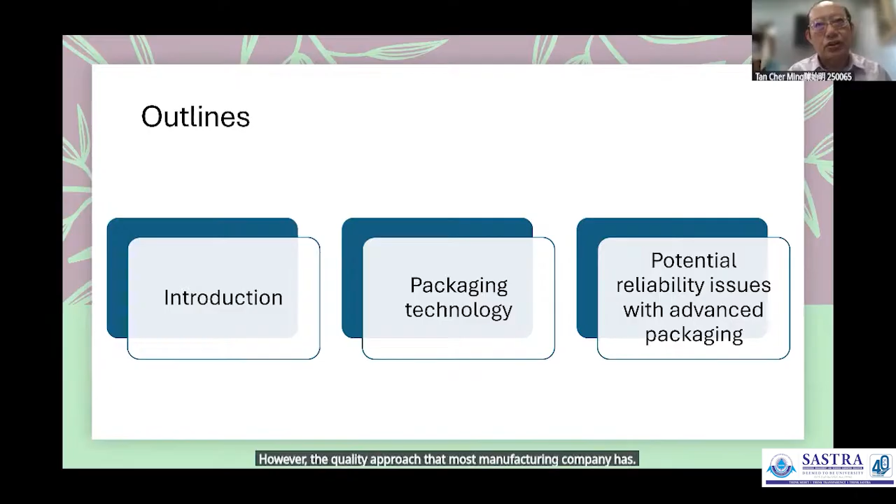However, the quality approach that most manufacturing companies have can only ensure that the functionality is there at the time when they ship to the customer. The methodology to ensure that the product can continue to operate at the customer site for the rest of the years, up to 10 or even 20 years, that is the regime of reliability. So quality and reliability are really different.

So today, what I want to look at is the potential reliability issues with this advanced packaging.

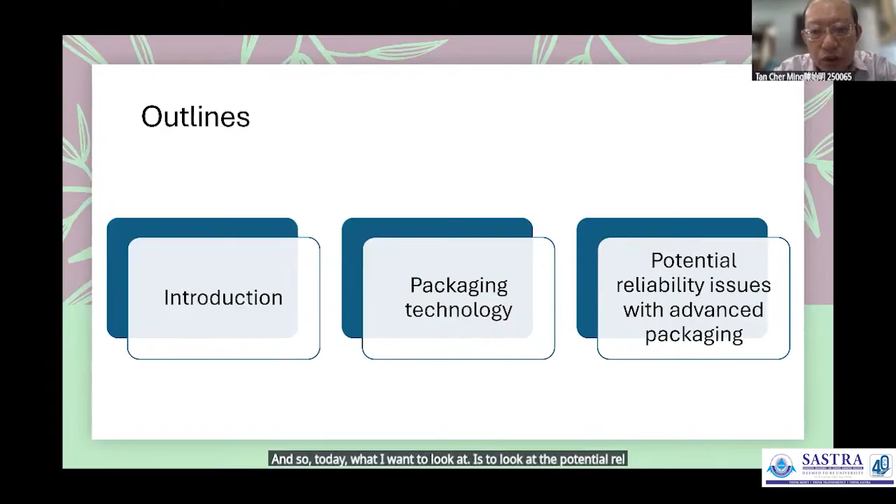As I mentioned, and as the previous speaker has spoken, integrated circuit packaging is a crucial final stage of semiconductor device manufacturing, because the chip itself is fragile. The silicon die is very thin, very small, very fragile.

Whereas the packaging is really to provide a protective case, so that this silicon wafer, although it can perform very high functionality, needs to be protected.

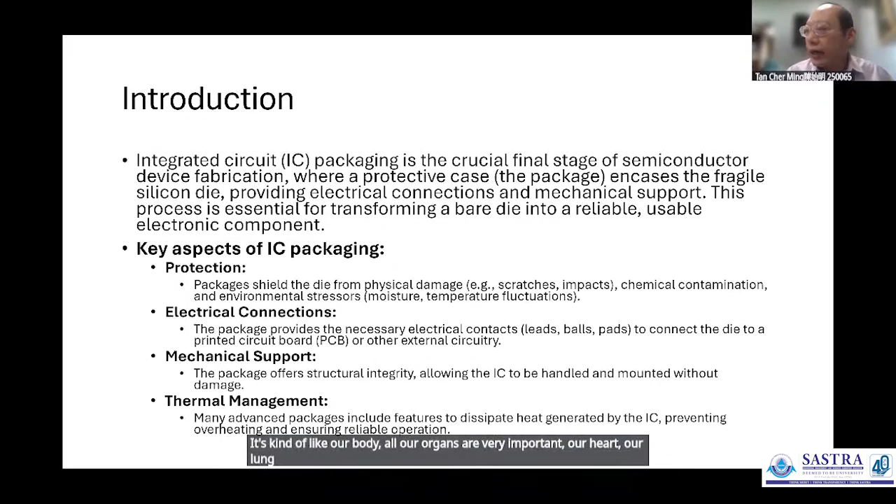It's kind of like our body - all our organs are very important, our heart, our lung, whatever. But we need the bone, we need the skin, we need the flesh to protect all our organs so that we can function. It's the same thing - IC packaging is a very important aspect for IC technology today.

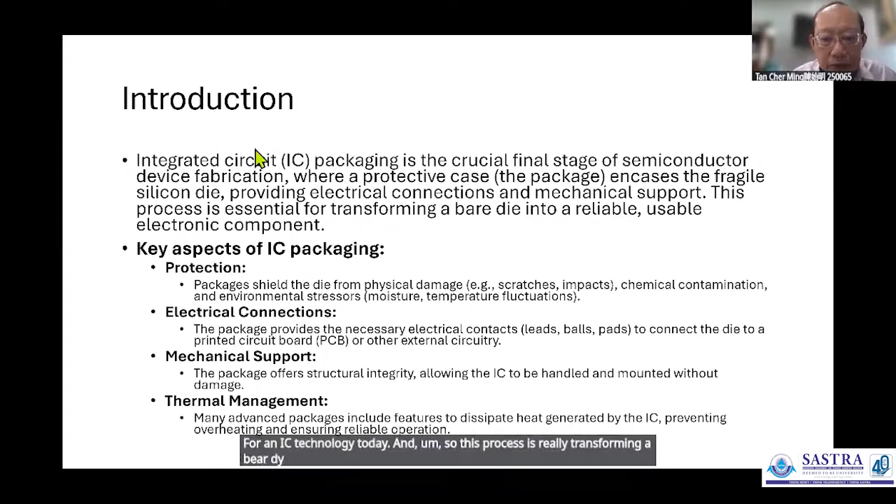This process is really transforming a bare die into a reliable, useful electronic component. In short, it provides protection, it provides electrical connections, it provides mechanical support, and it also provides thermal management.

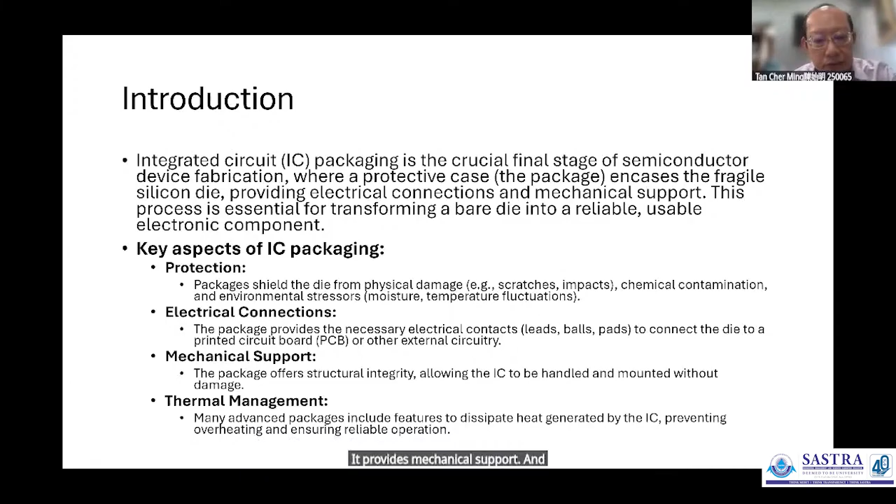As mentioned, today's advanced packaging technology is 2.5D to 3D packaging. With this technology, it allows us to do integration of multiple die within a single package, therefore increasing the performance and density.

With this 2D, 2.5D or 3D approach, there is heterogeneous integration, meaning we are putting different technologies - for example memory, sensor, RF components, etc. - into a single package. Therefore, with this heterogeneous integration, a single package can have good functionality and performance.

To the extent that if you include other passive components as well, we can build a system in the package. So the whole entire electronic system that used to be very big can now be very small, in a single package. By doing so, we can optimize the size and power consumption, and enhance the performance.

So this is a roadmap for packaging itself. In the 70s, it's DIP, dual inline package. Then in the 80s, where I started my packaging work, we have QFP, LCC (leadless chip carrier), PGA - pin grid array.

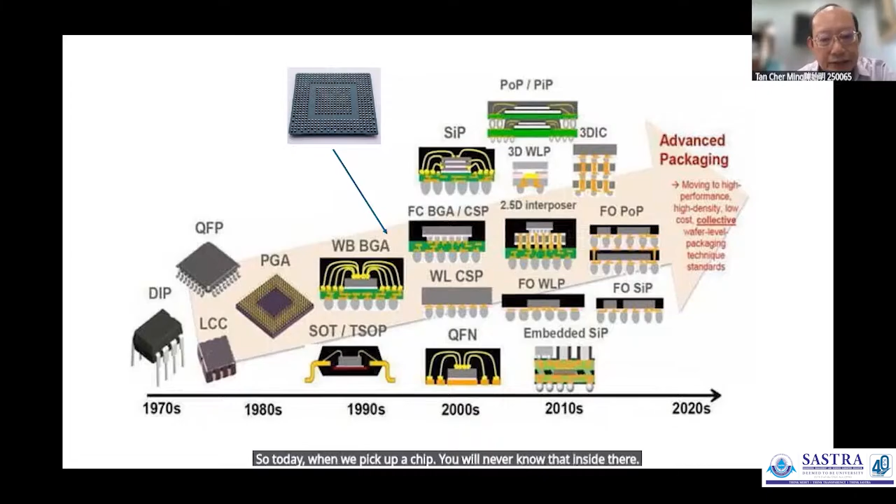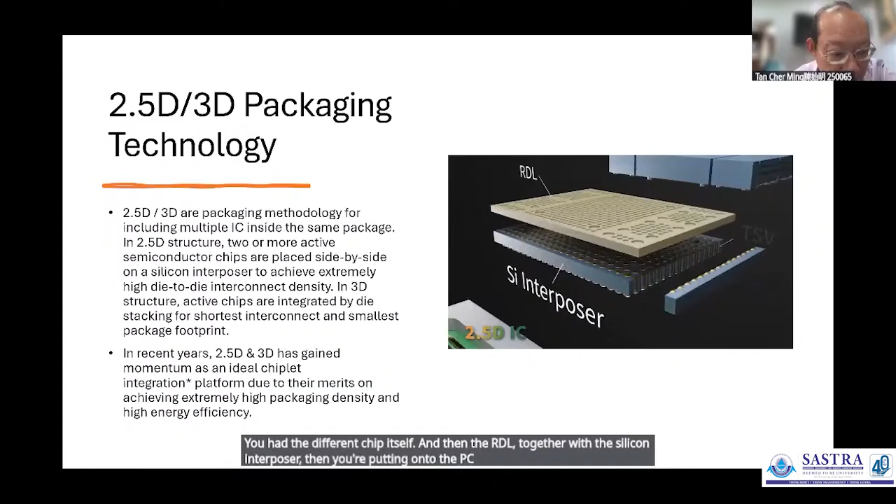So today, when we pick up a chip, you will never know that inside there could be many die, interconnected. This 2.5D 3D packaging technology really includes multiple ICs, and you can see from the video here the different chips, and then the RDL together with the silicon interposer, then you're putting it onto the PCB itself. Because of this 2.5D and 3D, it has gained momentum as the ideal chiplet integration.

As the previous speaker also mentioned about the chiplet, which is the present technology we are looking at. With this, for a chiplet, we need heterogeneous integration, which means putting different technology onto a single package. This is what we call heterogeneous integration.

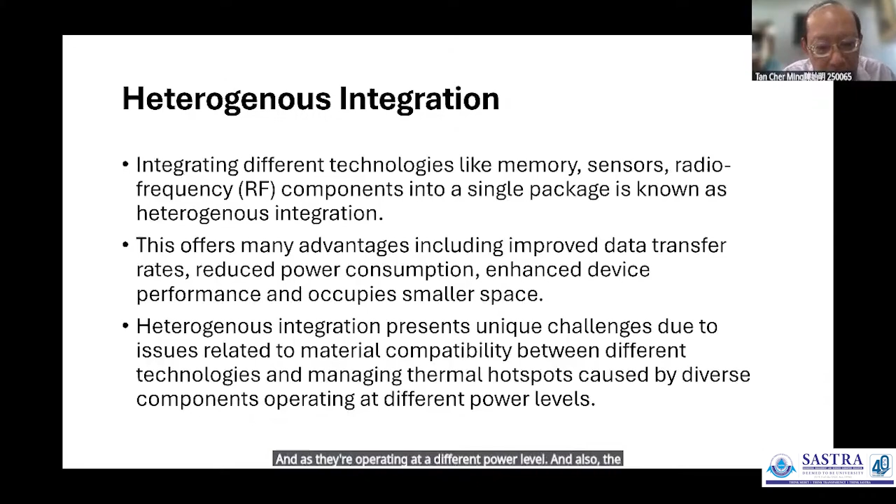Now, they offer many advantages. For example, the data transfer rate can improve because the distance is shorter. It reduces power consumption, enhances device performance, and occupies smaller space. But this heterogeneous integration also presents unique challenges because there are so many different types of material together, and they are also dissipating heat. So you have to manage thermal hotspots, as they're operating at different power levels, and as heat comes up, there'll be different expansion because of different materials, and this will cause stress.

So the advantage, of course, is clear: ultra high routing density, ultra high I/O density. It's almost more than 400 micro-bump per millimeter square. Think about a 1 millimeter by 1 millimeter area containing more than 400 micro solder bumps. And the I/O pitch is also scalable, so you can have either homogeneous or heterogeneous memory, power, and optical integration.

As today, optical communication within the chip itself is the thing that people are looking for. And we need an interposer because we need to connect at different levels. This interposer can also be made in such a way that it can also function as a decoupling capacitor. So if you do it right, the package reliability will be good, able to meet automotive requirements.

And so today we know that in the IC we need a lot of memory, what we call HBM, high bandwidth memory. This memory is usually made using 2.5D to 3D stacking together so that in a small area we can have many gigabytes of memory, because they stack up together. It's kind of like a high-rise building that has so many people in the same square area, staying there by stacking up into a multi-story building. With this, we are able to have high-end CPU, high-end FPGA, and network switches.

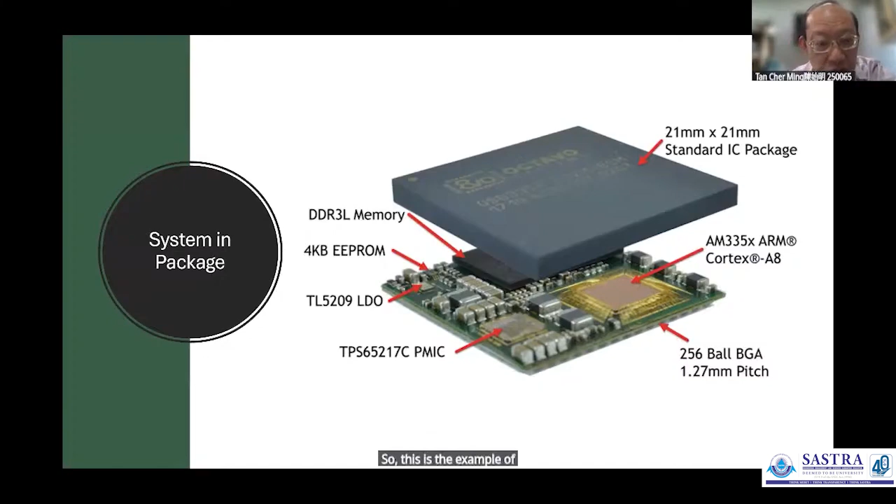And today, AI really requires all this 2.5D and 3D. So today we see AI and the technology getting better and better, and they really rely on chiplet, where 2.5D and 3D IC packaging play a very significant role to actualize what we see today in the AI world. So this is an example of a system in package, where you can have different chips packaged into one package itself.

Although the technology has advanced to such a level where we can have an entire system in a small package, we put so many different complex systems together to form a bigger system, which can enable the AI to provide the kind of data that we want.

But then there are potential reliability issues. As I mentioned, reliability is really very different from quality, but reliability is what is needed because you definitely do not make a chip that's so expensive, so functional, but only lasts for one year.

You want it to last as long as they can, and this is what reliability is. In order to ensure that all these chips are able to service the customer, service the user for a long period of time, we need to understand what are the different potential reliability issues associated with advanced packaging.

Here is a table that lists on the left column all the reliability issues that we can think of, that we are actually experiencing. On the right column is the packaging type that will be affected by this reliability issue. I will go through each of them later on, but within each reliability issue there are more issues within it. In other words, the reliability issue for this advanced packaging is a lot more than what you can think of. It's very complex.

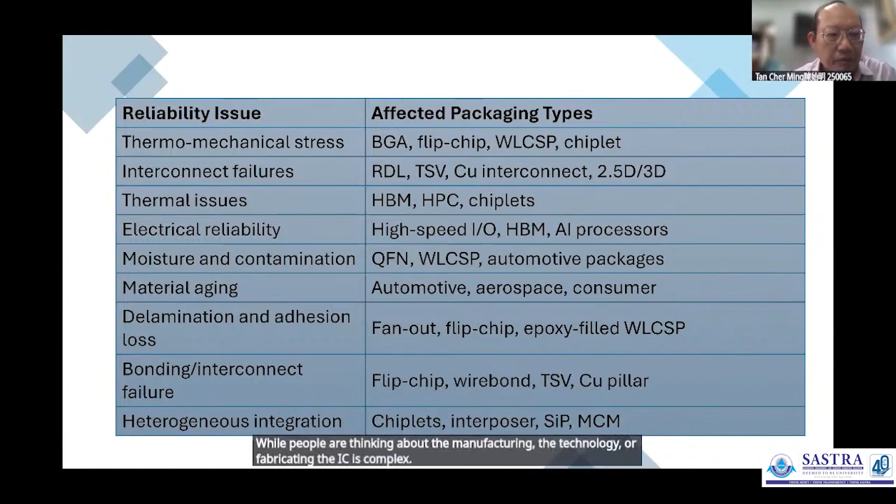While people are thinking that the design of the IC is complex, while people are thinking about the manufacturing, the technology of fabricating the IC is complex, what people do not know is that to ensure the reliability, facing all kinds of potential issues and to mitigate all these reliability issues is another complicated thing.

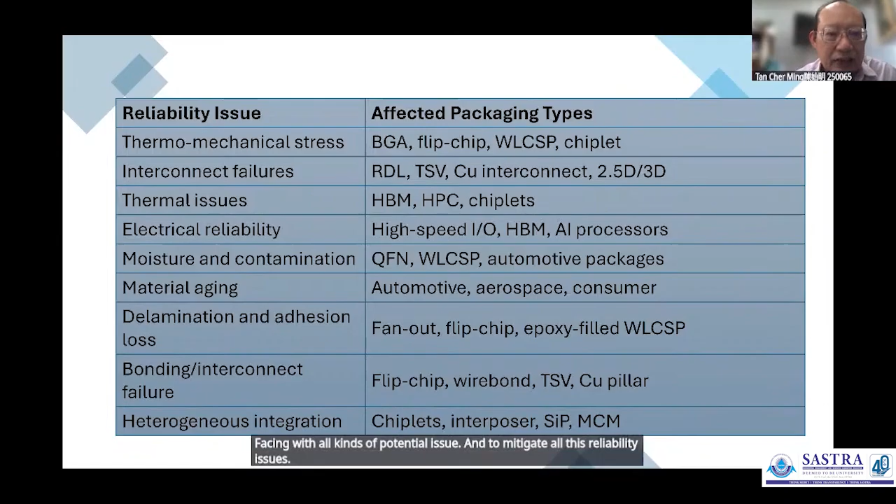Okay, let's look at each of them. In the thermomechanical stress, as I mentioned, because of the heterogeneous integration there are different materials. When you have different materials, then the coefficient of thermal expansion will be different.

In fact, when you go into the package itself, we don't even talk about the complex 2.5D or 3D. We have a silicon die with a substrate, with the molding compound which is the polymer, and we have a solder. All these are different materials.

So when the chip is operating, the temperature increases and therefore there will be CTE mismatch. The corresponding issues with this thermomechanical stress will be solder joint fatigue, delamination, cracking in the die or in the molding compound, or warpage, which will affect the yield, and also whisker formation.

Now you can see there are so many issues even within a topic itself. I don't have time to go through every one of them, but I will pick one from each group to have a discussion.

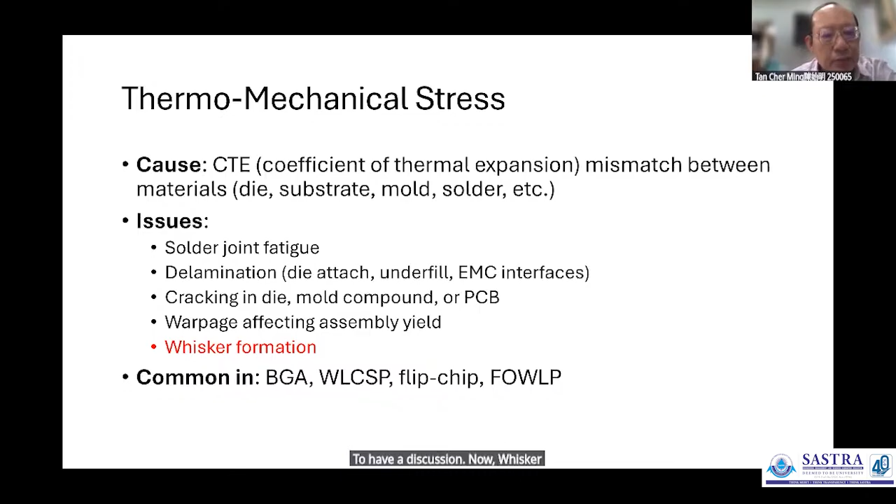Now, whisker is something that may not be very familiar to many people. What is whisker? Tin whiskers are electrically conductive. They are really a crystal of tin that is grown from the surface of the tin itself, and they are needle-like and can grow to a length of several millimeters.

In today's world, we are talking about miniaturization and integration. Several millimeters means that it can expand across several die, several contacts. And the growth is actually not entirely, not fully understood.

In fact, we know that it is a compressive stress that causes the tin crystal to grow out, especially in high temperature and also humidity.

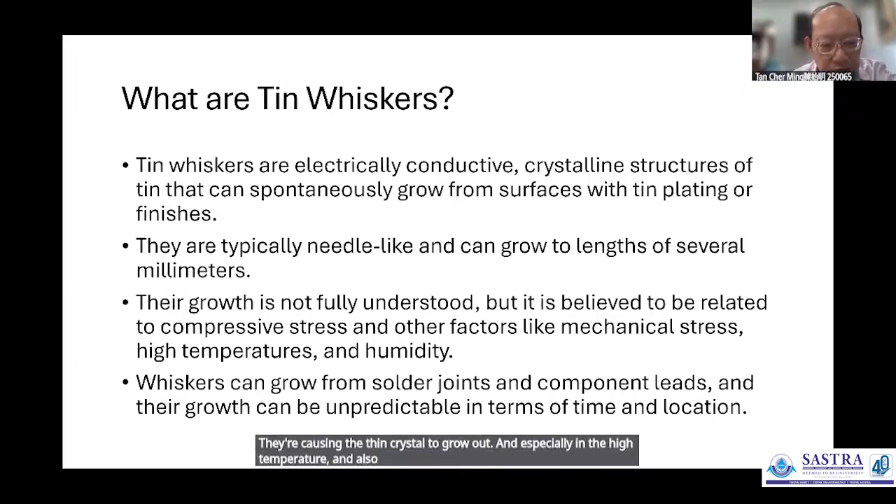And this tin whisker, although it's very tiny, can carry current up to 25 milliamps, and can sustain an electric field of several tenths of volts, maybe like 0.5 volt per millimeter, before it burns out.

So in other words, it can cause some havoc. It can cause some problems because it can carry the current, it can sustain the voltage. It's not like the moment it forms, it burns out. So when it carries current, it can cause a short circuit.

And this short circuit can be intermittent, because the moment the current passes through, it melts and stops. But it can also be sustained.

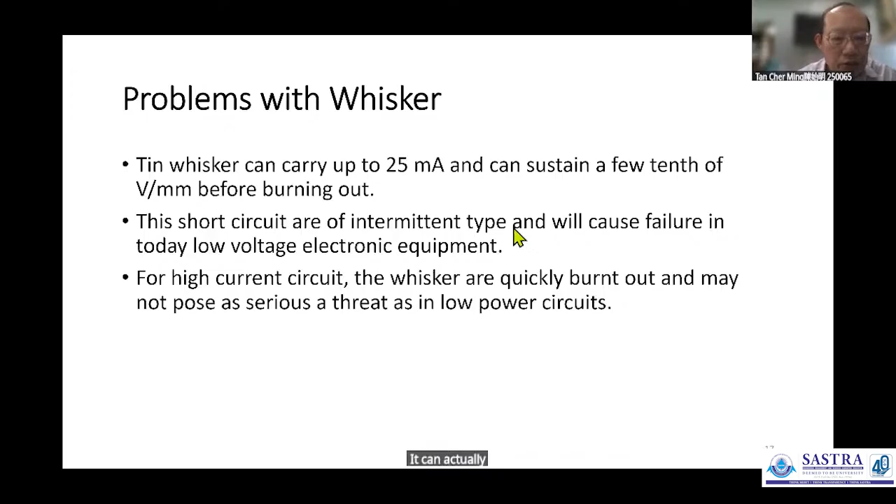This is especially true for low current circuits, because for high current circuits, the current is high, and the moment the whisker is formed, it will melt almost immediately due to high current. However, today's ICs emphasize low power, low current. This means the tin whisker that is formed will sustain, and therefore it can pose a very serious threat to low power circuits.

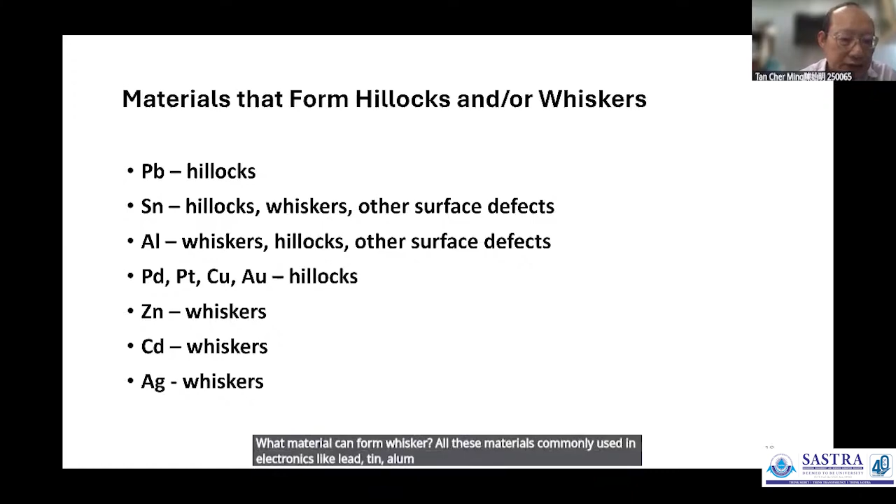What material can form whisker? All these materials commonly used in electronics, like lead, tin, aluminum, copper, zinc, and silver, can all form tin whisker.

This is a cross-section photo of the tin whisker. You have the solder on the copper itself. The grain structure of the tin is laminar, so when there's compression stress from both sides, this grain of tin has to go up.

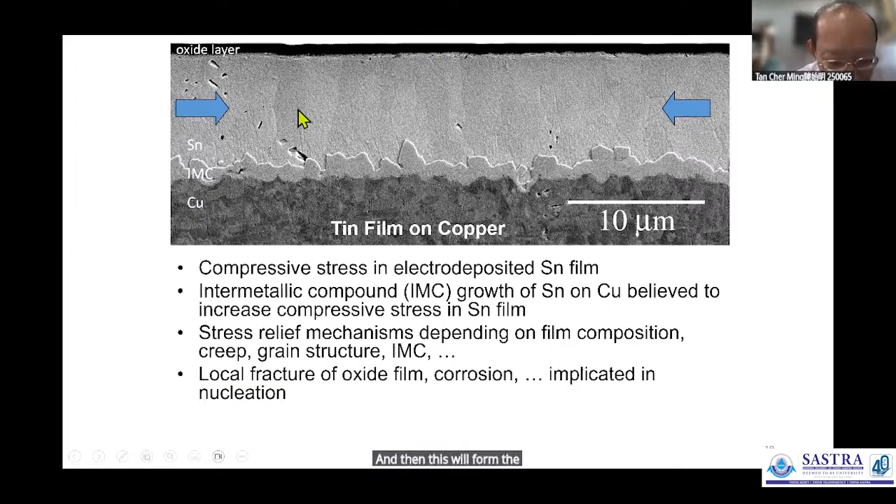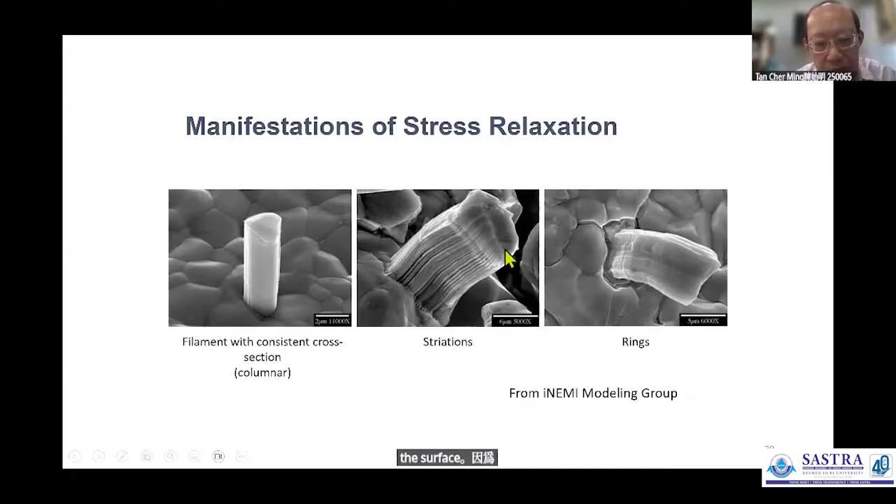This will form the tin whisker. You can really see it under the electron microscope that the tin actually pops up from the surface. If it is too long, it may bend itself. All these are indeed true pictures of the tin whisker that's formed.

You can see the solder ball itself. Today's standard microbumps use tin-silver-copper, which we call SAC solder. When you have stress, you can see the tin whisker coming up from here.

As I said, the tin whisker can be long, and it will continue to grow. Before you know it, it will not cause any electrical problem initially when it grows, so the circuit will function as per normal. But the moment the tin whisker grows to a certain distance, it will short circuit to the nearby solder, and the whole thing will get short circuited. It will malfunction, or it can even cause burning.

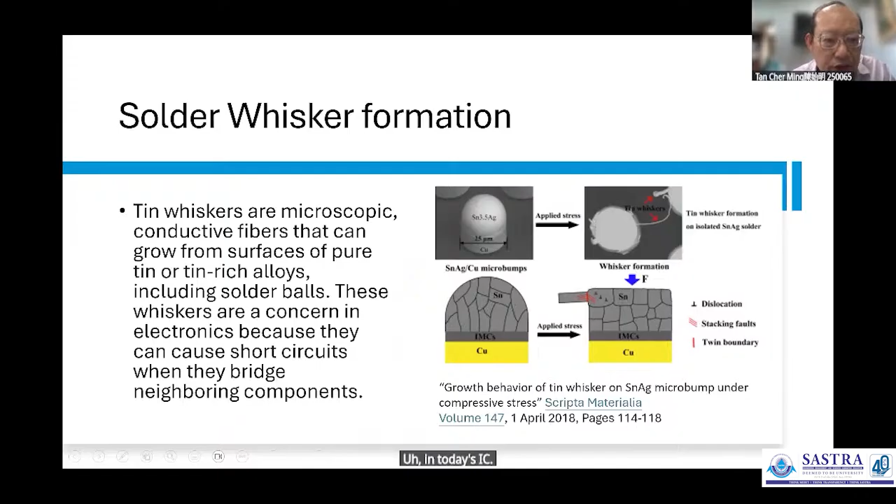This is a very serious issue in today's IC. Why is it serious in today's IC? Because in the early days we used lead solder. When you put lead in the solder, the tin whisker is suppressed. But the moment people changed to lead-free solder, tin whisker growth increased in an amazing way.

Without a good understanding, when people changed from lead solder to lead-free solder, tin whisker became a very serious reliability issue, even until today.

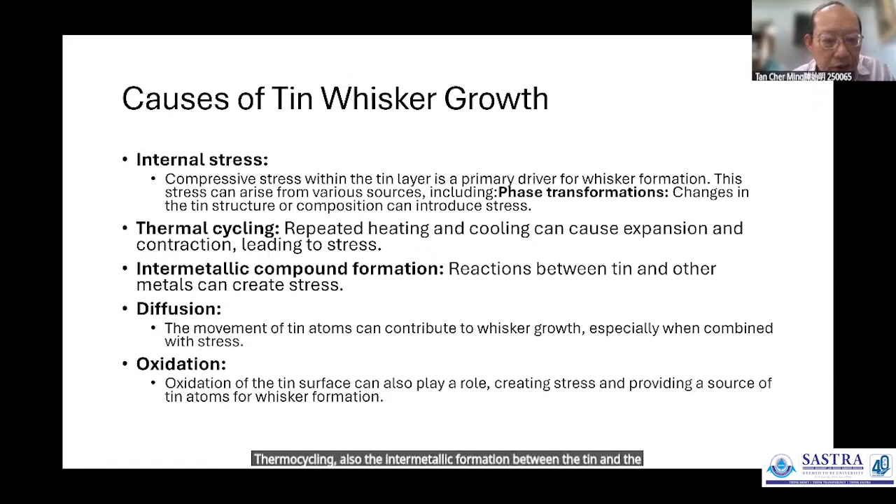The cause of it is really due to internal stress, thermal cycling, and also intermetallic formation between the tin and copper, which causes stress in the tin itself, as well as oxidation. So it causes short circuits and component failure, and before it happens, you may start to see a lot of electrical noise, or sometimes even intermittent operation. So it is a safety concern because it causes short circuit.

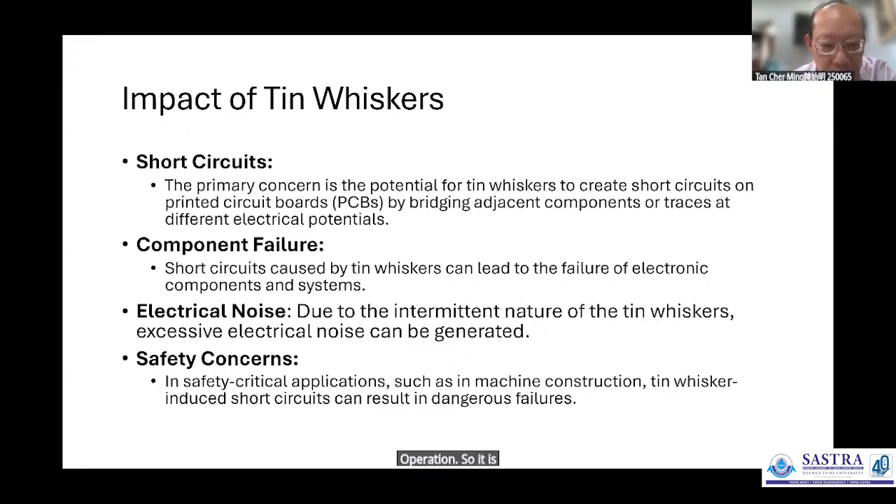The way to mitigate it, of course, is to put an alloy in. As I mentioned, if you put lead in, everything is fine, but lead cannot be used. So people are trying to look into putting different alloys in the tin solder. For example, the common SAC 305 or even 105 is not immune to tin whisker formation.

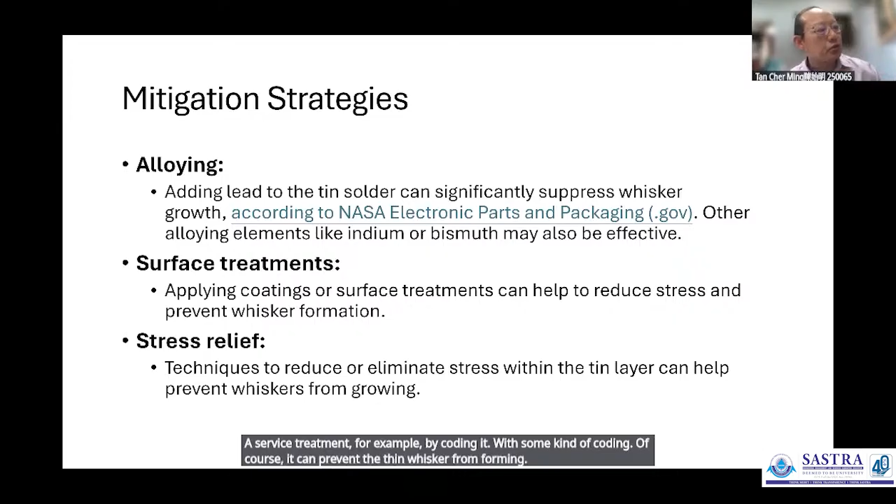Surface treatment, for example by coating it with some kind of coating, can prevent the tin whisker from forming. But you have to remember that the tin whisker is as small as a needle, so even if you coat something, the needle is so sharp it can poke through the coating and it will still form. You cannot eliminate it, but you can only prolong the formation.

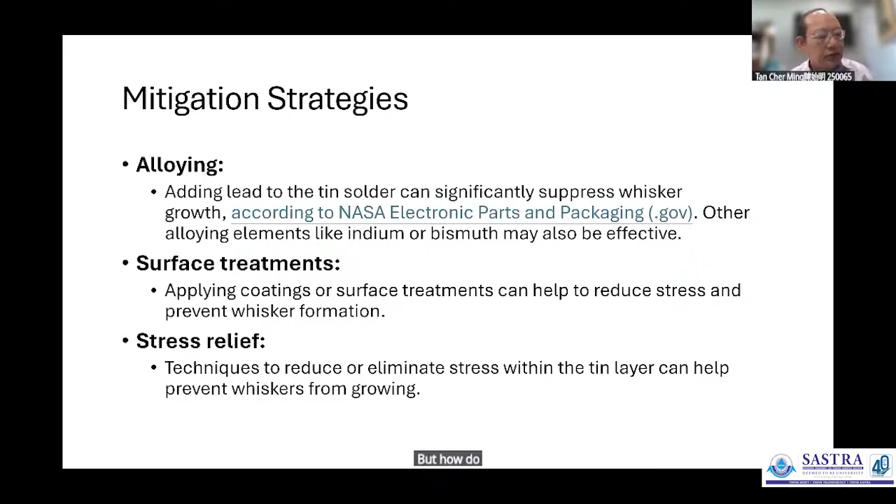Of course, the best way is to release the stress, because the root cause is the stress. But how do you release the stress? It's a different thing because there are so many solders together.

All right, so that's one of the reliability issues. Then there is interconnect reliability: electromigration, stress migration, corrosion.

Within this, as I mentioned, today in heterogeneous integration you have the RDL, which stands for redistribution layer, causing cracks because of stress migration. The TSV, just like I mentioned about the 3D IC and the micro bump, can have voids and therefore cause open circuit. The copper interconnect in the tiny PCB inside the chip itself, because the line width of the copper is still very small, unlike the traditional PCB, will have electromigration.

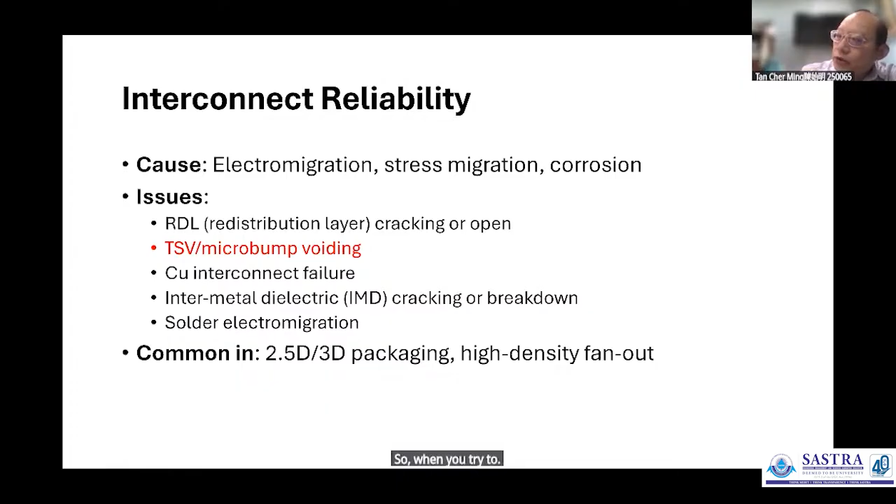Also, during the bonding, during the solder bonding, because today's ICs use an ultra low K material, when you try to solder the solder bump into the RDL itself, the mechanical force can cause a crack in the underlying dielectric. And solder itself is so tiny that solder electromigration is a problem.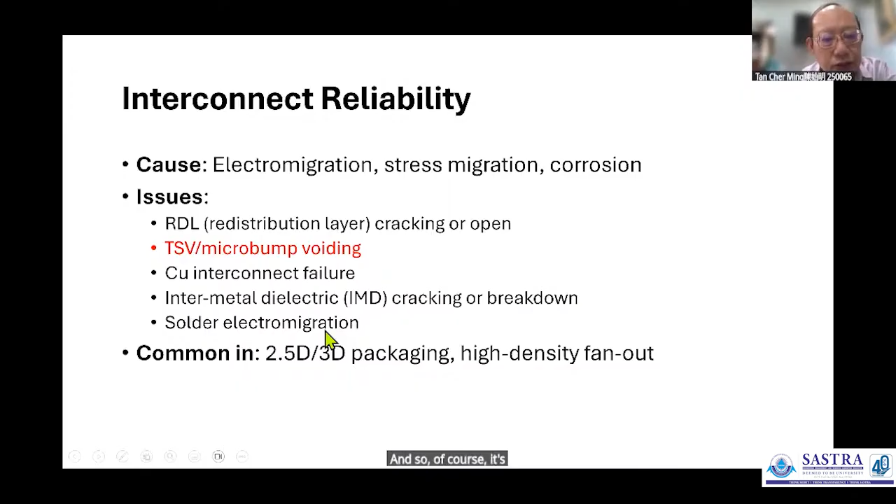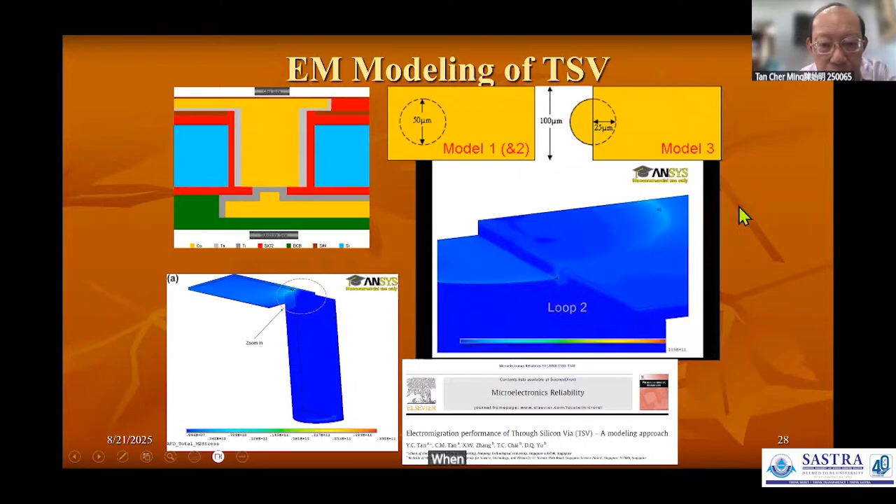Now, TSV is what we call through silicon via. I did a study on this through silicon via in 2010, where you can see that when you start to pass current through it, this is the through silicon via, this is the interconnect connecting to the through silicon via.

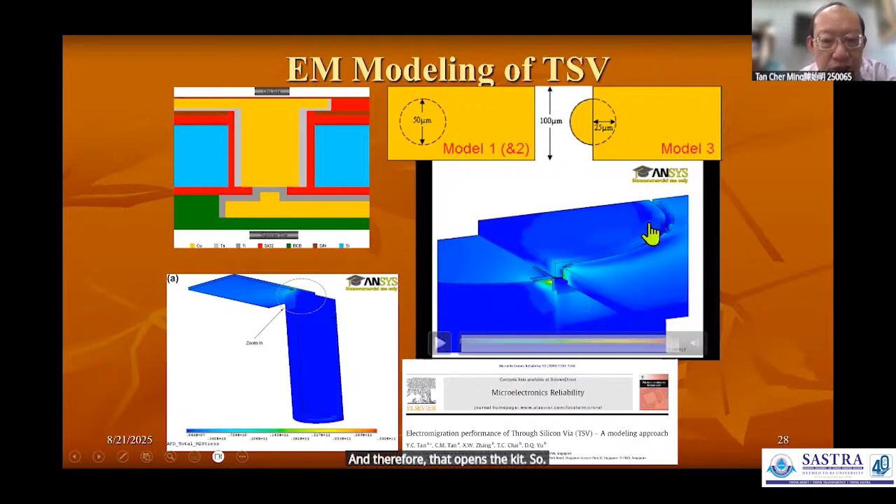After a while, you can see there will be a crack forming, and then it continues on, and finally this crack, this aluminum, this could be a TSV, so copper, this crack can form, and in the end this connection from the circuit is no longer connected to the TSV, and therefore becomes an open circuit. So this crack is not because of mechanical stress, it's purely due to electromigration itself.

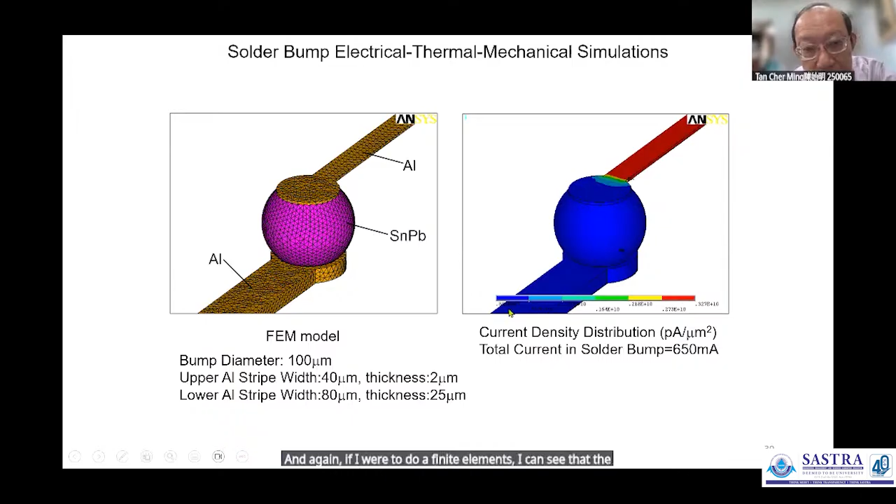Now the EM and the solder, let's say you have a solder ball with aluminum, in the early days when this leaded solder was still allowed. If I do a finite element analysis, I can see the current distribution is very concentrated at the corner here. And if I remove the aluminum strip and just look at the ball itself, you can see a tiny stress concentration here.

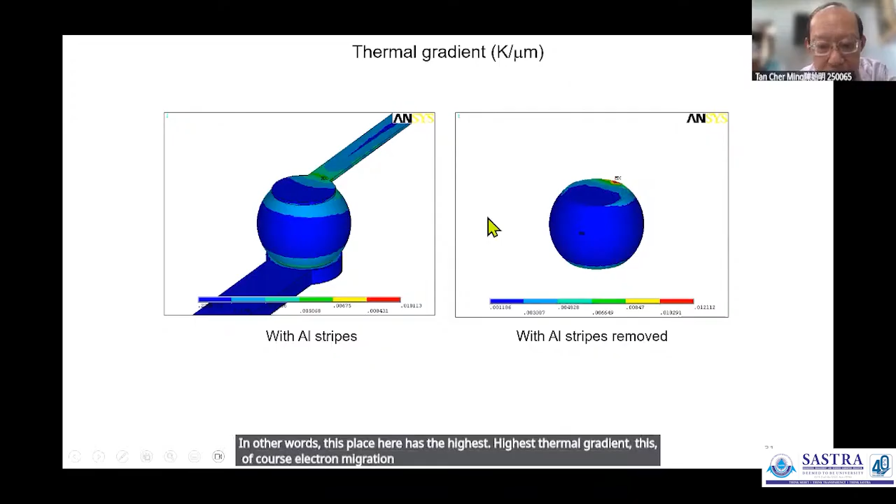This stress concentration is due to the thermal gradient. In other words, this place has the highest thermal gradient. This will cause electromigration to progress, and the thermomechanical stress is also highest there.

This is experimental work that people have done. You can see that for different types of copper and different types of solder, as you go from 0 hours to 300 hours, they're always at the corner side, as shown from the finite element analysis, where there's a stress concentration. This stress concentration causes electromigration to move inward to the center. In the end, this causes an open circuit - in other words, the solder is there, but there's no electrical connection. This will happen within 300 hours, not long.

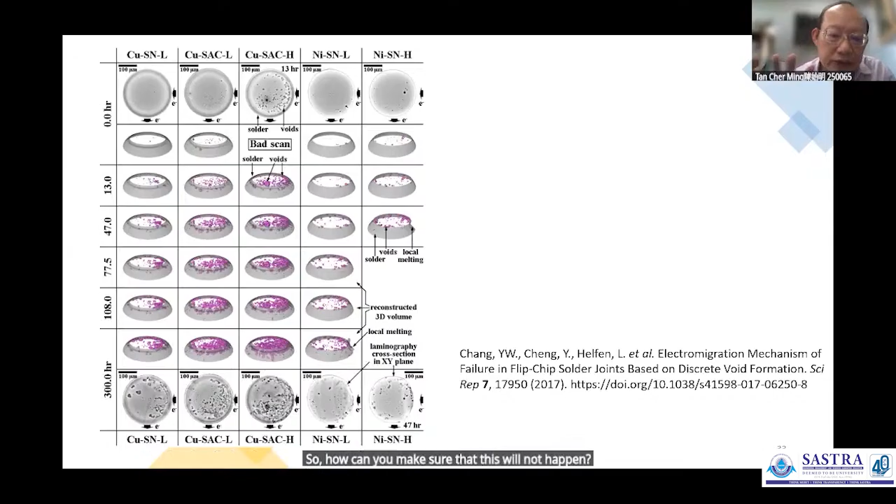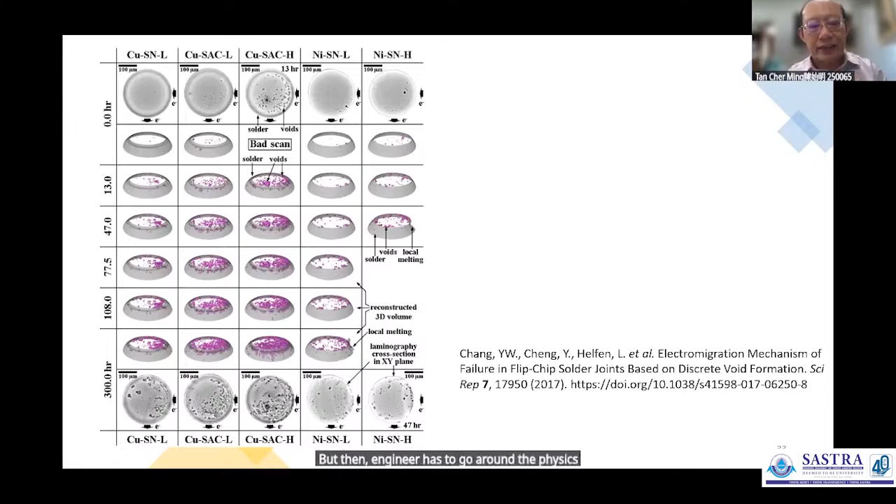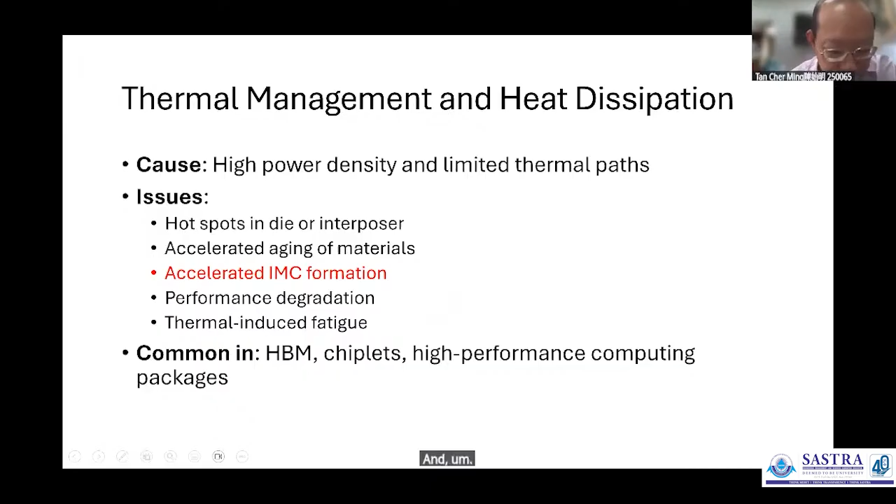One of them is IMC formation - IMC is the intermetallic compound. When the solder connects to another metal, whether it's copper or whatever, they will form an intermetallic compound. This intermetallic compound is necessary for good soldering. However, once they form, they continue to grow after the process, after the reflow, due to thermal aging and cycling.

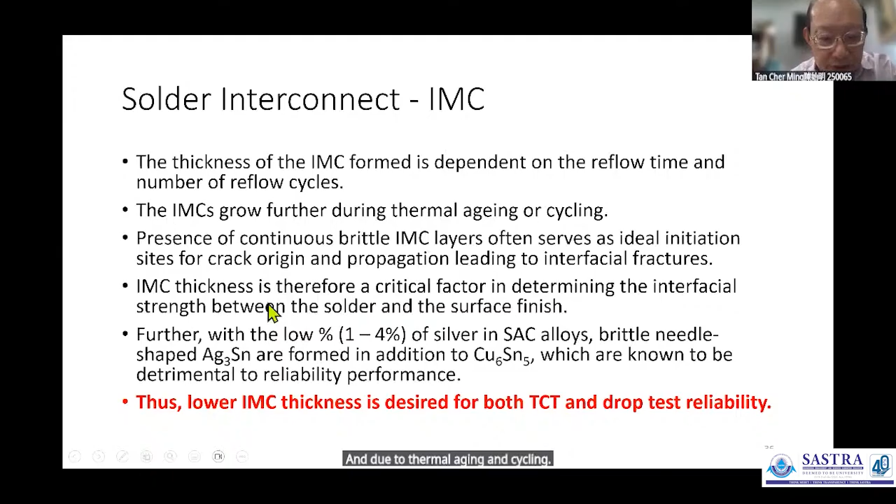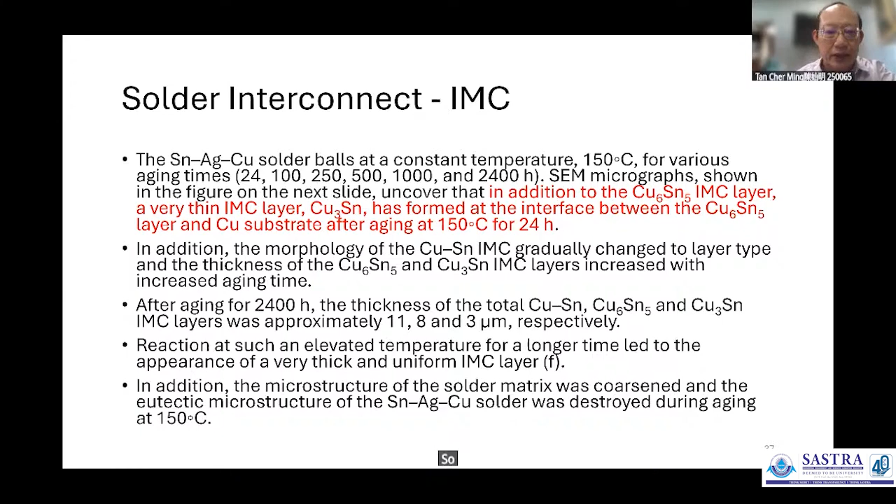The problem is that Cu3Sn is very brittle - almost even more brittle than glass. So when it becomes so thick and occupies the interface, when you drop it, it's almost like throwing glass onto the floor, and this whole thing will collapse. This very thin IMC layer forms and causes weakening, so in the end the solder joint fails. But you won't see it because everything is inside the package - you'll just see that your package is not working, because of this.

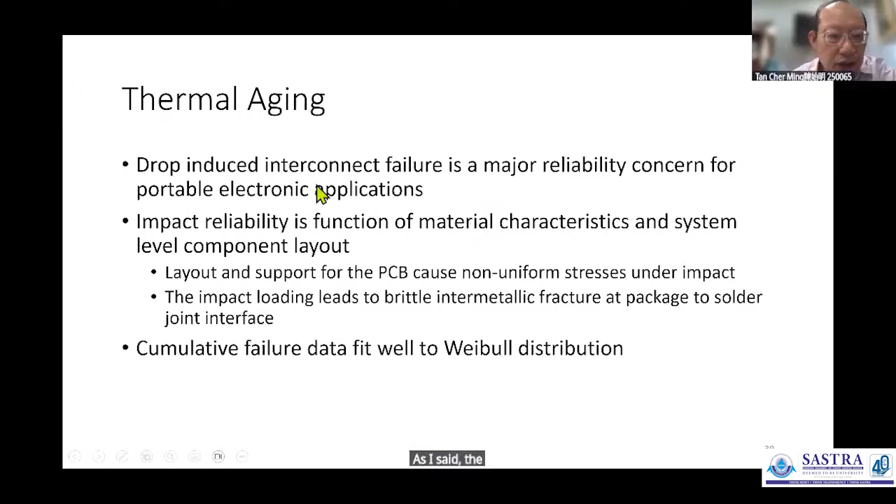Now, thermal aging is another issue, especially for molding compound. But before we go to that - as I said, Cu3Sn is very brittle, so when you drop it, it will actually break. You can see this experiment people have done: they put the solder through thermal aging at 125 degrees C for 10 days, then did drop tests. 50% of the samples will fail - it's still quite high, you need to drop it about 90 times before they break.

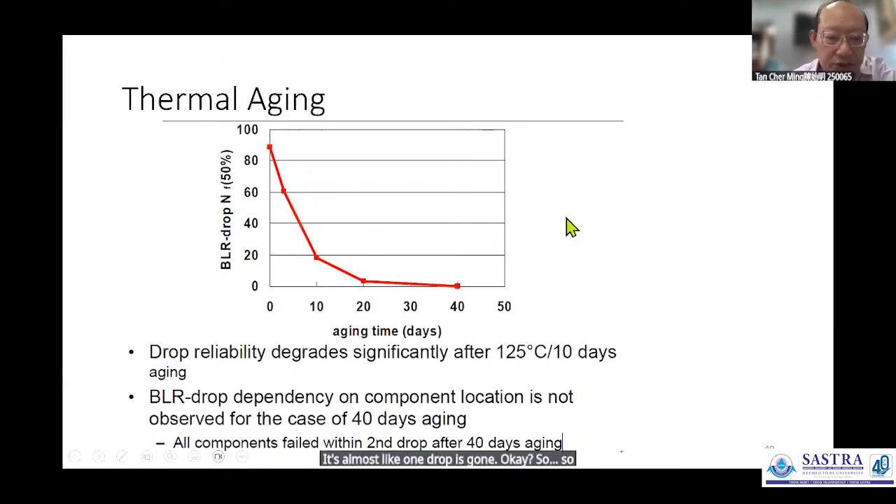But as you continue aging for 10 days, it drops immediately - you just need to drop it 20 times and 50% of the solder will already give way. If you age it to 40 days, it's almost like one drop and it's gone. The reason behind this is the formation of the Cu3Sn, and you can see that it's totally broken.

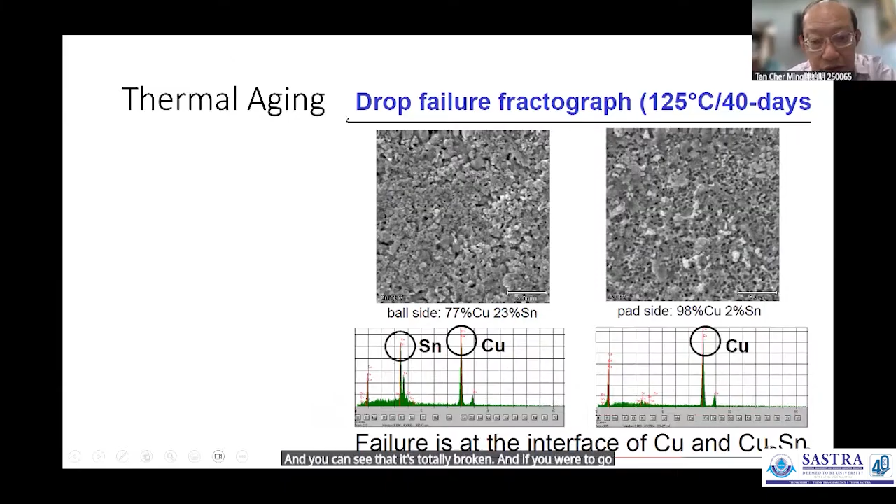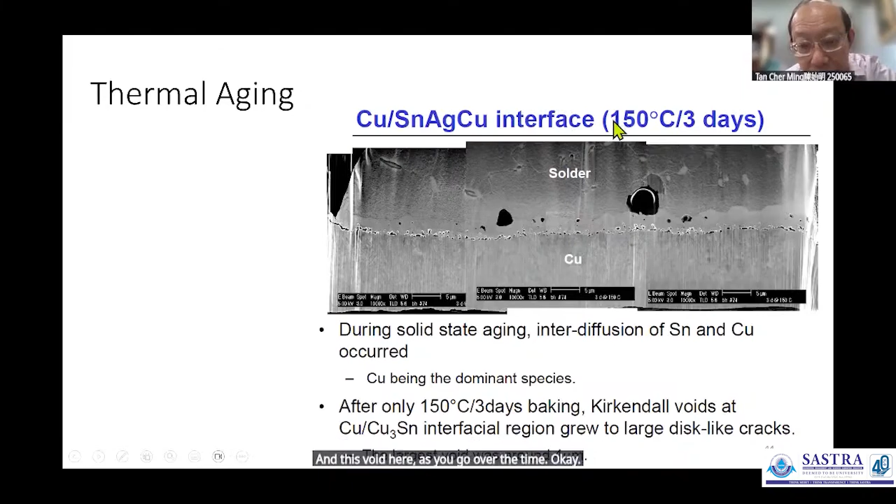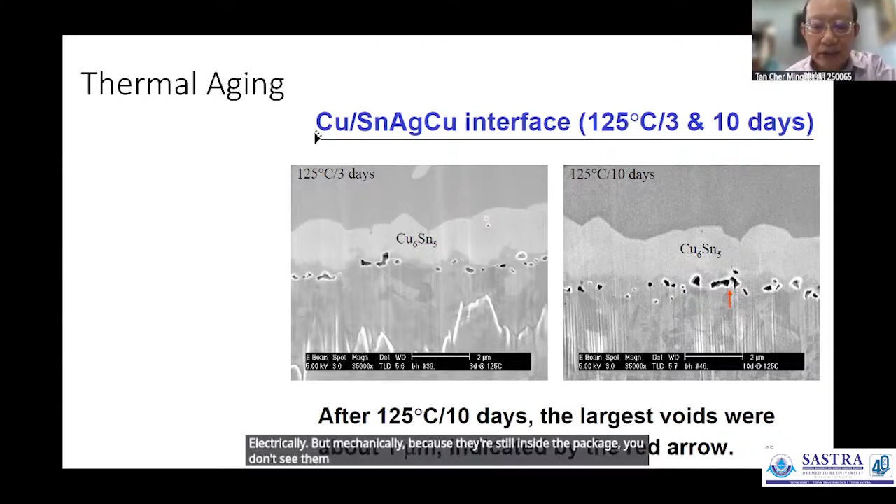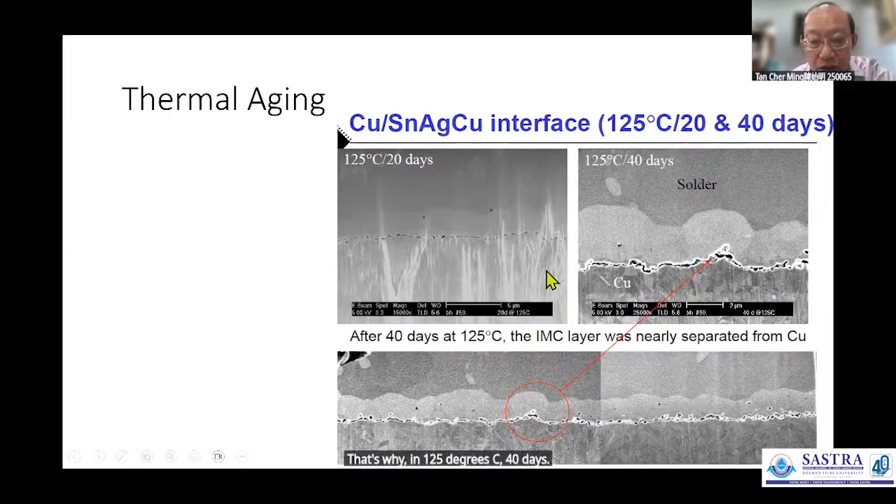If you go to further analysis, you can see that the Cu3Sn forms a lot of voids. As you go over time, at 150 degrees C for 3 days, these voids will form together in a line. In the end, it will form a line and the two things virtually detach electrically. But mechanically, because they're still inside the package, you don't see them falling apart. In terms of functionality, though, they're gone. That's why at 125 degrees C, 40 days, in one drop, everything is gone.

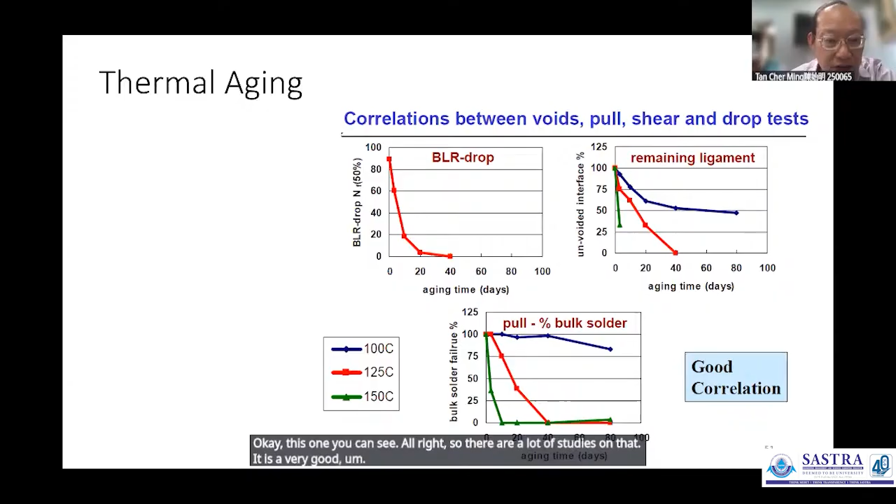There are a lot of studies on that, giving a good understanding of what's going on. So the IMC is one of the important things in packaging that we need to watch out for.

Electrical reliability matters because there is always dielectric in the IC itself. When you have a high current, a voltage overshoot because of parasitic inductance causes a voltage overshoot. All these things cause electrical noise, affecting power delivery and therefore signal integrity. They also cause dielectric breakdown in the insulation layer because of voltage overstress.

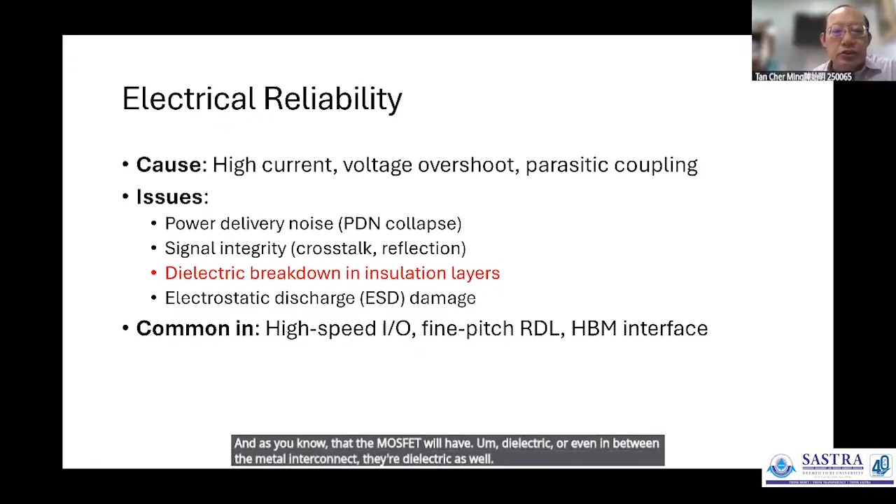ESD is of course an issue during handling. But once you assemble the circuit, whether in the RDL or on the PCB, if it's not properly done, there will be parasitic inductance causing a voltage overshoot that applies a high voltage to the IC itself. As you know, the MOSFET has a dielectric, and even between the metal interconnects there is dielectric as well. So this dielectric, because of the high voltage, will break down.

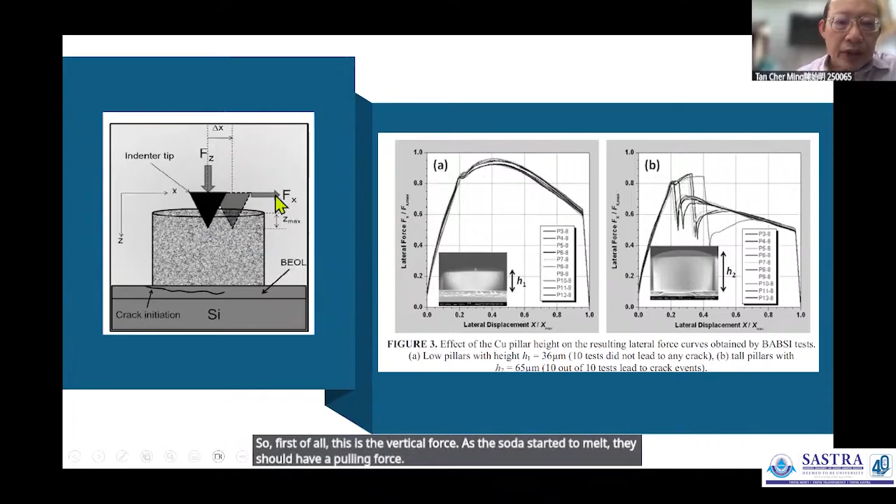This dielectric, during the bumping process, will also cause cracking. For example, this is silicon with a solder bump. When I do the soldering, first I attach the chip onto the substrate, and the solder starts to melt. First there's a vertical force, and as the solder starts to melt, there's a pulling force. As a result, this force creates a moment on the surface of the solder bump, and this moment causes a crack underneath because of the low-K dielectric, which has very weak mechanical strength.

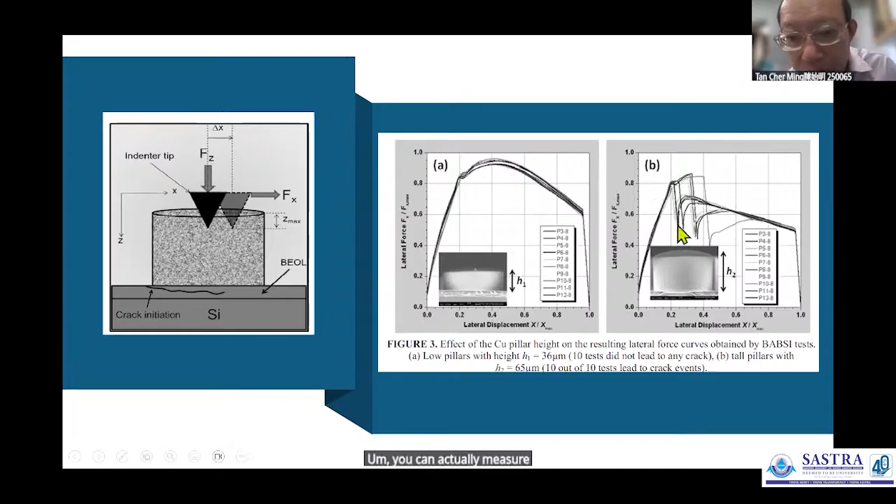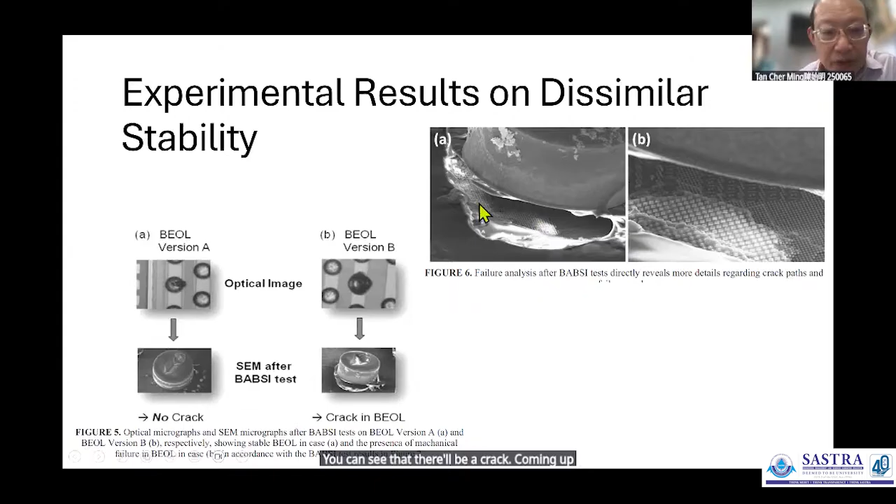You can actually measure or evaluate how good they are using different methods, which I won't go through. You can see there will be a crack appearing, a failure, even before the operation of the chip itself. This means that the moment you flip-chip bond the chip onto the substrate, because of the force, you can cause a crack underneath the interconnect. Unless you lift up the interconnect, you weren't able to see that, and this is actually happening.

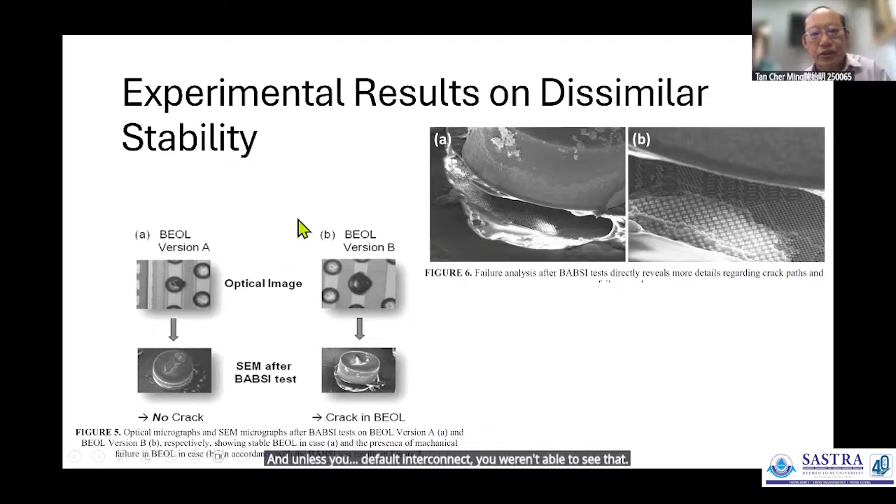Another issue is moisture and contamination. Packages are supposed to protect the die from moisture and contamination. But if the sealing is no good, moisture or contamination can get in, especially during the reflow process. Because of different thermal expansion, there will be some gap, and this can let moisture in. Also, if the package or the PCB itself has moisture inside, during reflow the high temperature turns it into vapor, producing what we call the popcorn effect.

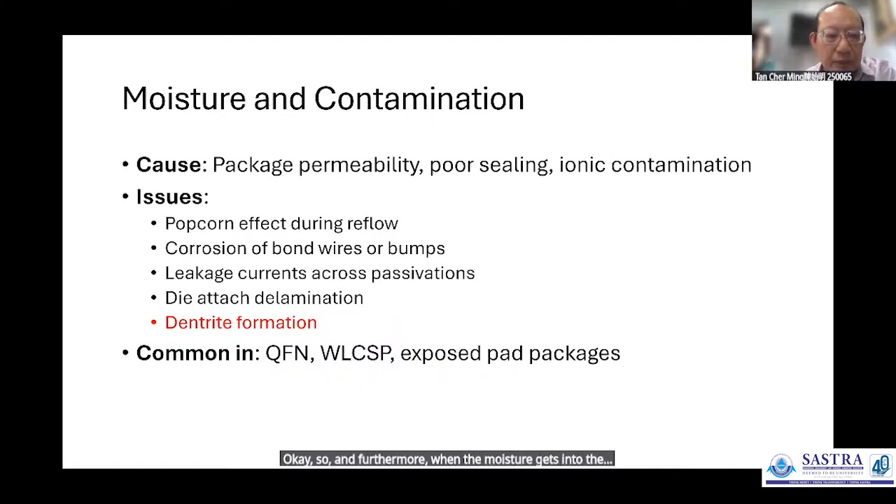Furthermore, when moisture gets between the solder bumps, it will also cause dendrite formation, and then corrosion - I won't go into detail because of time limitation, but electrochemical corrosion will be there. The dendrite is what's going on: when you have two solder points with moisture, because you apply different electric fields, the solder will start to migrate in the moisture from anode to cathode, and in the end, a short circuit.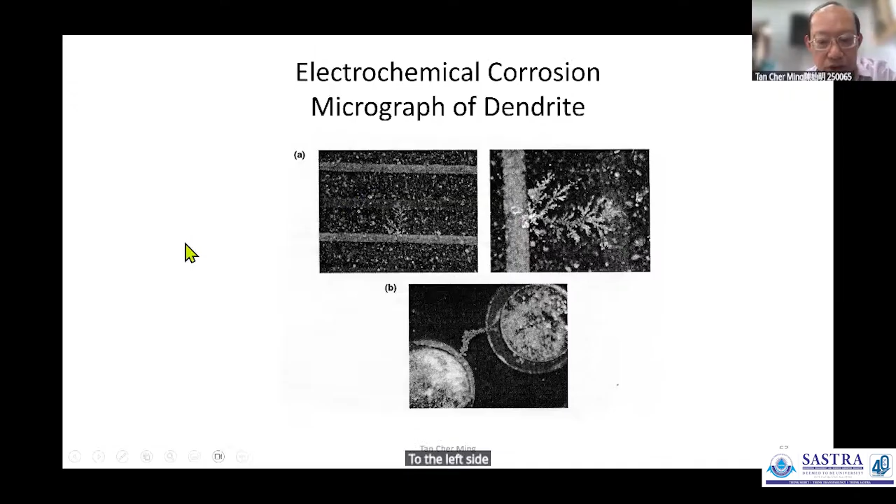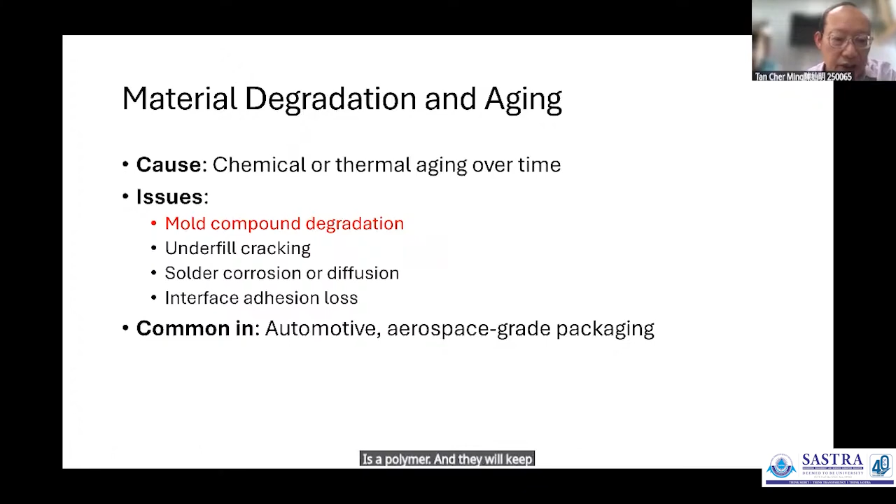Material degradation or thermal aging: the molding compound is a polymer, and it will keep on moving as you continue to operate, among other issues. This thermal aging happens because during molding, the polymer is in a molten, rubbery state above its glass transition temperature. Then you cool it down. If you cool it too fast, there's no time for it to reach thermodynamic equilibrium, so the material will start to move to reach that equilibrium.

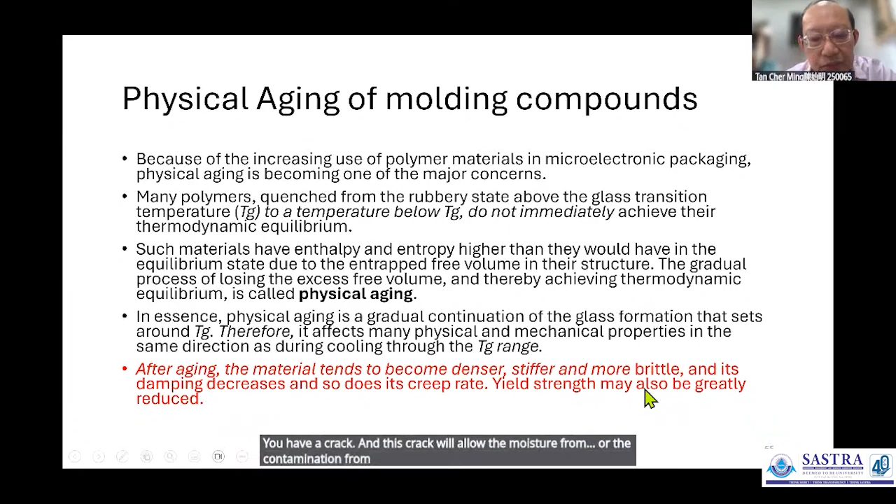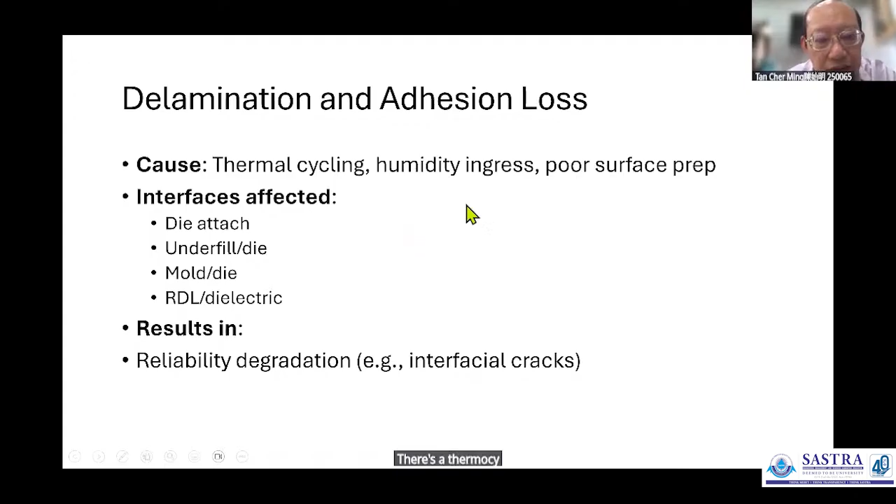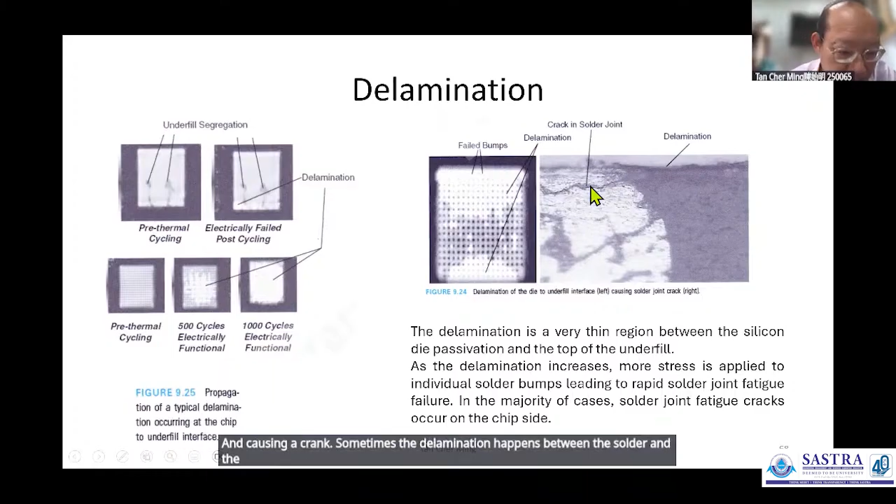In the chip we have wire bonding, solder bump, and micro bump, and all of these form an intermetallic as I mentioned before. The wire bonding can also cause a break, and all of this causes problems.

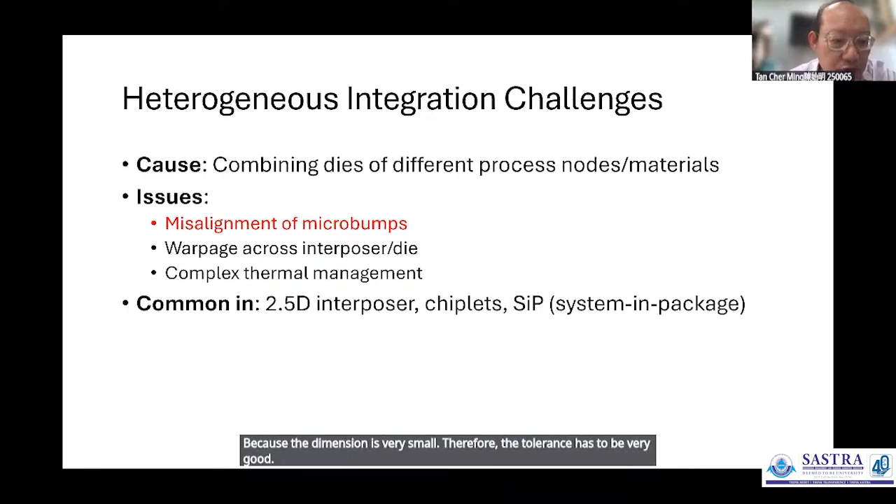When we come to heterogeneous integration, we are combining dies from different processes. When putting a die onto the substrate, there are micro bumps, and misalignment of the micro bump can be an issue because the dimension is very small, so the tolerance has to be very good. Also, because of different materials, it can cause warpage if the design layout is not proper.

In conclusion, there are so many potential reliability issues just in the packaging itself. Although we enjoy the functionality, we expect that functionality to last long enough for us to enjoy it. But if it fails fast because you don't look into these potential reliability issues and address them, your package won't last long. The time of enjoyment will be very short. Put more realistically, no customer will want to buy from you because your chip is not reliable, despite its functionality.

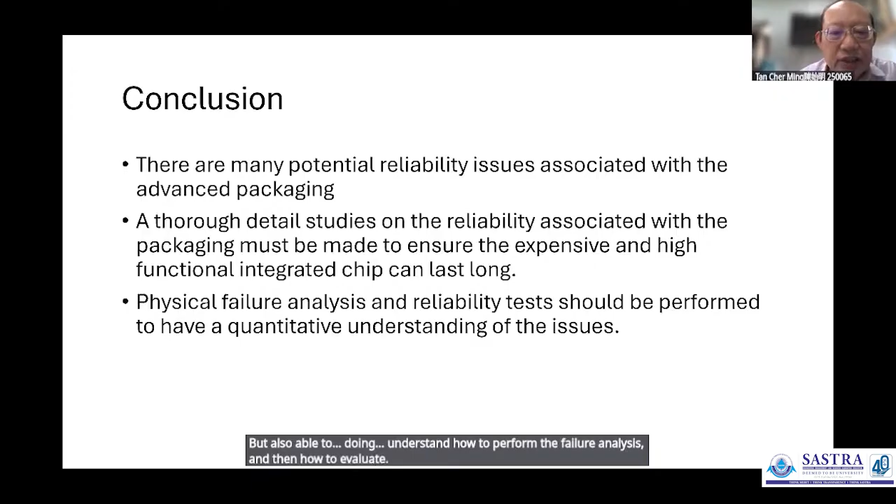So we need a thorough study of the reliability associated with the package - not only understanding the physics of reliability, but also being able to perform failure analysis and evaluate the reliability of your die with respect to all the issues I mentioned before. With that, I conclude my talk. Thank you.